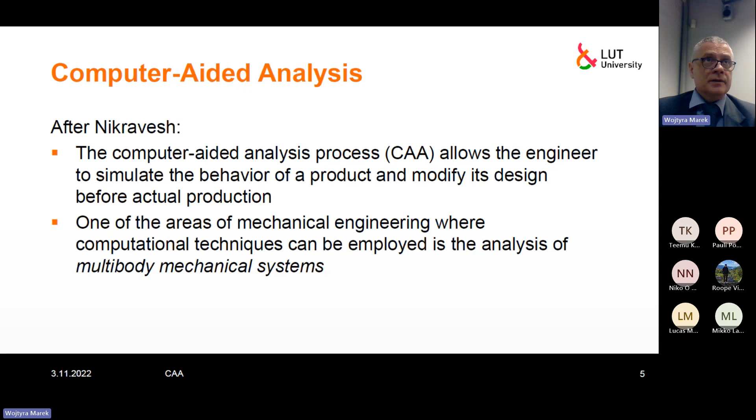So mechanisms are everywhere. Those here are relatively simple, but we have much more complicated mechanisms all around us. A vehicle is a mechanical system, quite complicated. An airplane, everything that moves, an excavator, the lift in this building - so quite a lot of mechanical systems are in our surroundings.

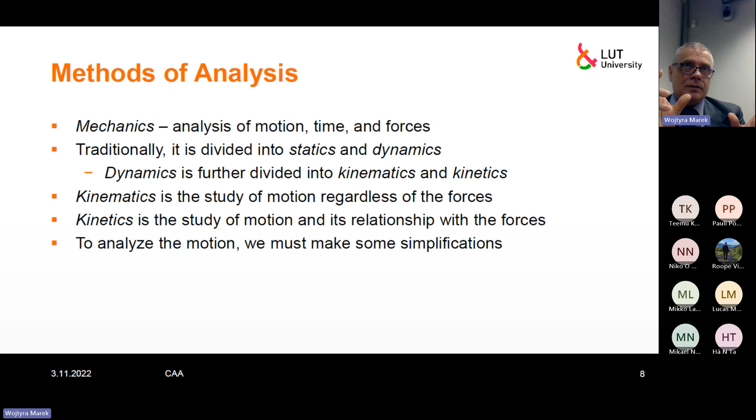It means parts that do not change their shape during motion. They move, they change position, change orientation, but the shape of the rigid body remains unchanged. The other important simplification is that joints are ideal, so we neglect friction. This is important in dynamics—if joints are ideal with no friction, then the calculations are much easier.

It's easier to go forward. Of course, all of those assumptions can be weakened. Taking a next step, we can model multibody systems which are not composed of rigid bodies. We can introduce flexibility and combine flexibility of parts with large rigid body motion of those parts. It's doable—of course it's doable to put some friction model into a joint and to model this. Yes.

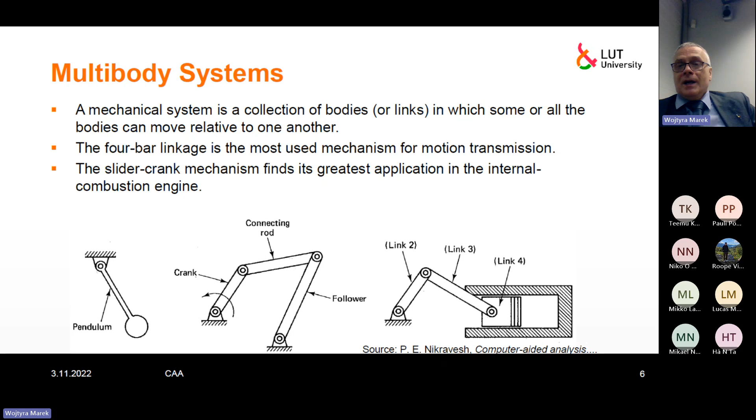We have seen this slide, and this as well. Okay, now some equations, finally.

We quite often need to analyze motion of our system. This is a simple example of a slider crank mechanism, and we are interested in finding the velocity of point B here, having the dimensions of the mechanism. So OA, from here to there, the distance is A. From here to there, the distance is B. And probably phi, this angle here, is given.

In this precise moment, the angle here is 30 degrees. We know the dimensions of this mechanism. We are asking where is point B, and it's probably revealed on the next slide. We know the angular velocity phi dot is known. So we will be asking: what is the instantaneous velocity of point B?

Well, it's a valid question if you want to study thermodynamics of compression gas in the cylinder. You need to know how this mechanism behaves. So this is an example.

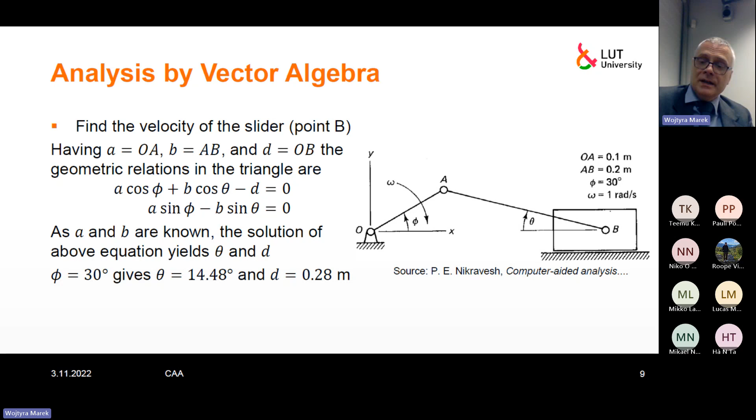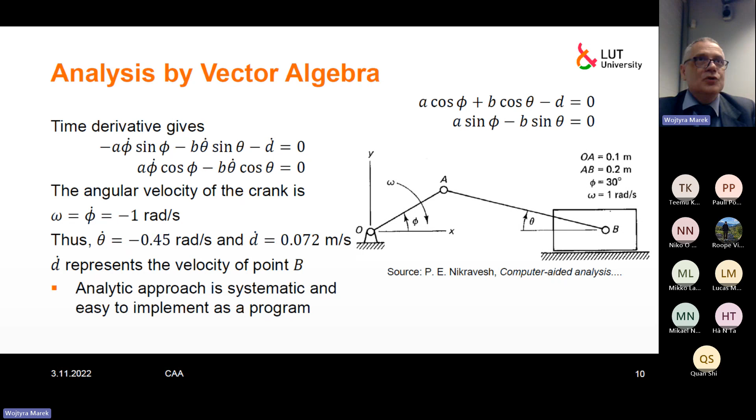So it's good to know, because usually the kinematic part takes a lot of the course, and people don't always know why we deal with those accelerations, because differentiation is quite complicated and tedious. Why do we bother? Well, there is a reason: Newton's law, basically. Okay, let me move on.

In order not to start from scratch for every single mechanism, we can think about computerizing some calculations, and we can do it in two different ways. We can try to create a general multibody code, a program that automatically creates and solves equations and provides us with results, a program that can analyze virtually any mechanism.

The other option is not to use a general purpose program, but a program specially designed for our particular mechanism. In terms of efficiency, if we derive equations for one particular mechanism, we can do it in a much more efficient way, especially the final code would be more effective.

Sometimes we have to do it if we want to analyze a system in real time. For control purposes, we sometimes need to calculate the reality faster than reality occurs. It is very helpful to provide proper control for systems like robots or maneuvering aircraft. So efficiency sometimes is crucial, and we have to analyze mechanisms as efficiently as possible.

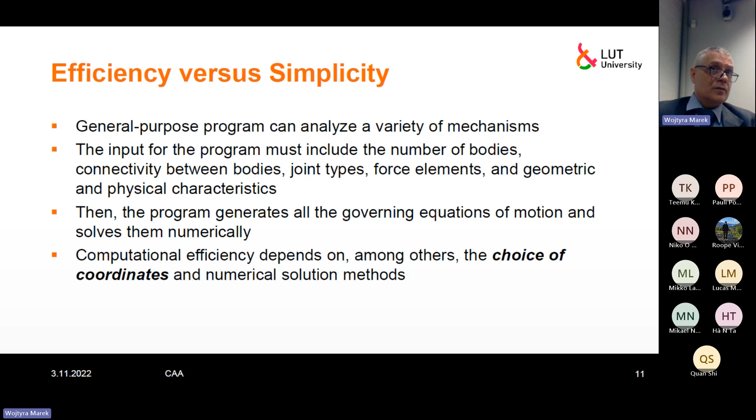Computational efficiency depends on many things, on the skills of the programmers, for example, but also on the choice of coordinates. There are some coordinates that are better for multi-body dynamics than others. The next part of this lecture will be devoted to the choice of coordinates.

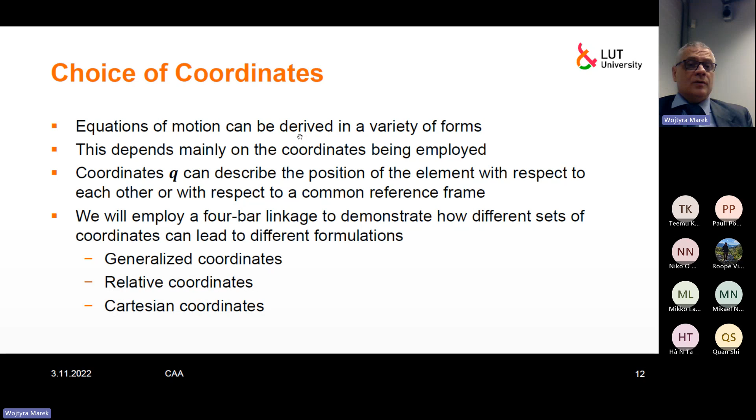So let's go through some examples of choice of coordinates. Let's have a look at the 4-bar mechanism again.

Let's start with generalized coordinates, or minimum coordinates. If we've got a mechanism with 1 degree of freedom, as this has, theoretically we could just use 1 coordinate. Basically, if I know the phi angle here, the set of coordinates is just phi angle. I can tell what's going on with the rest of the mechanism. So the position of the mechanism is fully described by setting the proper value of angle phi, and the other important angles, like angles in all other joints, can be calculated as functions of phi.

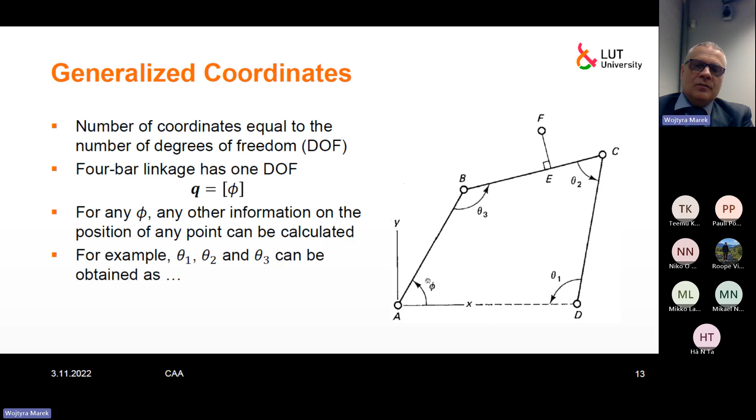Is it easy? Well, it's not rocket science, but the mechanism is not very nice to analyze. If I ask about θ2, it takes some time to say what θ2 is for a given phi. Somebody did it, well, it's like this - probably high school geometry, some theorems, some triangles analyzed, and so on. You can express everything in terms of phi, then calculate auxiliary values like θ1, θ2, and θ3, and solve it. But looking at this example, we can say it's not extremely easy to do so.

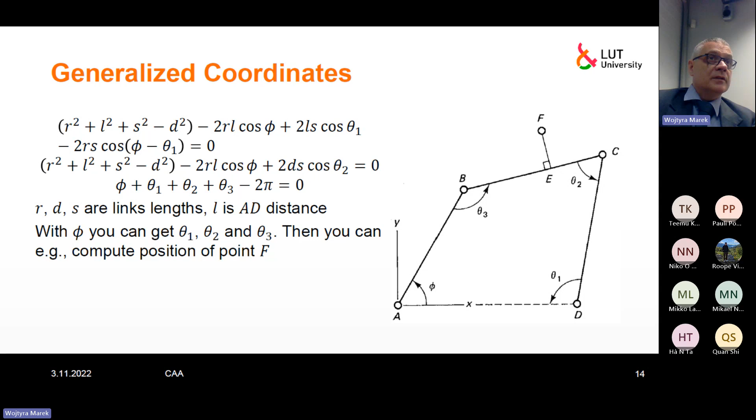Not at all. So this is a very nice simplification, but valid only in planar systems. If you are going to analyze a robot or something which is 3-dimensional, well, that's not the proper way to measure relative coordinates. So this particular picture shows a very special case, very useful, and in planar systems we use it often.

But in general, the idea of relative coordinates is that you measure angle or displacement with respect to the neighboring body. This joint B is created by part 1 and part 2. Coordinate phi2 should measure relative motion of part 2 with respect to part 1, in the canonical approach to relative coordinates. Okay, can we choose those coordinates independently?

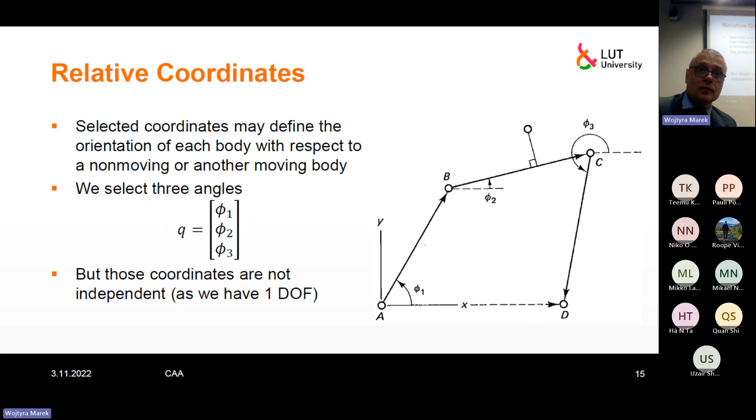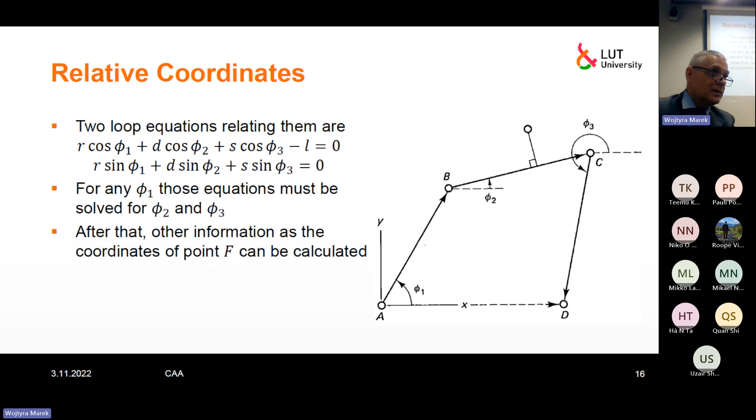If we go back to relative coordinates, you see in constraint equations all coordinates. If there are more bodies, you will see more coordinates in your equations, which means that in the Jacobian matrix you will have a dense matrix. Every single column will be filled with some derivatives of constraints. That's not the case in absolute coordinates, because if you take the derivative of this first equation with respect to coordinates of body 3, there is 0, 0, and 0.

The more bodies you have in your system, the more zeros you have in the Jacobian matrix, because that's a rule. In absolute coordinates, your constraint equations involve just coordinates of part number 1 and part number 2, no more parts. So you have hundreds of parts, and in the Jacobian matrix you will have zeros, zeros, zeros, and just somewhere something non-zero. You can use sparse matrix algebra for computation. So the matrices are huge, but they are not dense, they are very sparse.

Well, have you had a course in finite element methods or structural dynamics? They do have large matrices, like million by million. Of course, they never store it, because they know they are so sparse. Non-zero elements are located at very precisely known places, and sparse matrix algebra helps to solve this huge problem. The same can be done here.

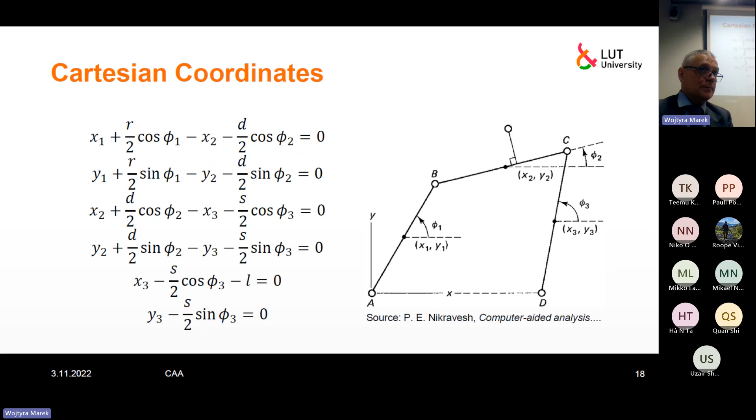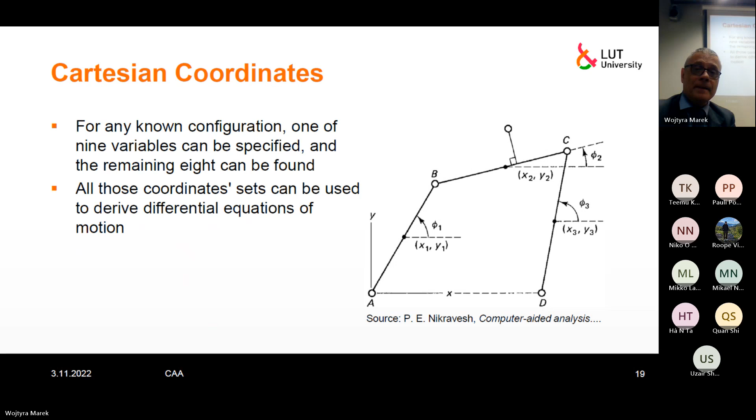So basically, seminal books in multibody dynamics by Nikravesh, by Haug, they all use those absolute Cartesian coordinates because it's a good idea, because they are very nice to do the job required. Okay, so that's the summary of set of coordinate choice.

If we look at minimum coordinates, of course the number of coordinates is minimum, the number of equations is minimum, there are no constraints, but derivation of all equations is very difficult. Development of a program, creating a program, is also very difficult. Relative coordinates are much easier than minimum coordinates, but much more complicated than Cartesian coordinates. As you can see, efficiency-wise, Cartesians are not so efficient, but the difference is not so dramatic.

This part is very important. Cartesian coordinates are easy. We have a uniform approach to everything. Every joint is represented by a separate set of constraints. Every single part has its own set of coordinates. So it is very regular, very easy to automate, and very useful that way.

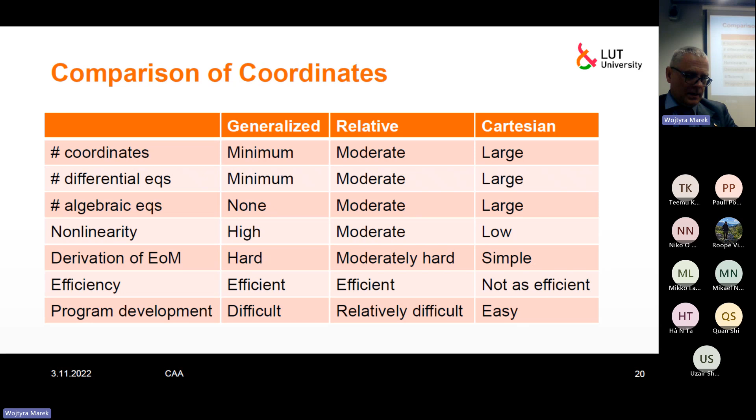To finish this, there are also very nice coordinates called natural coordinates. You may have encountered them somewhere. They were developed in the 80s and 90s in Spain by Garcia de Jalón and Eduardo Bayo. In fact, they are still being used, especially in academic studies, not necessarily in general purpose multi-body codes. With natural coordinates, some crucial points of the mechanism, like points at which link joints are located, are used as coordinates. There are even more natural coordinates than absolute coordinates, but equations are usually much simpler because they are linear or quadratic equations, no sines, no cosines, no angular quantities usually, which is quite a nice feature.

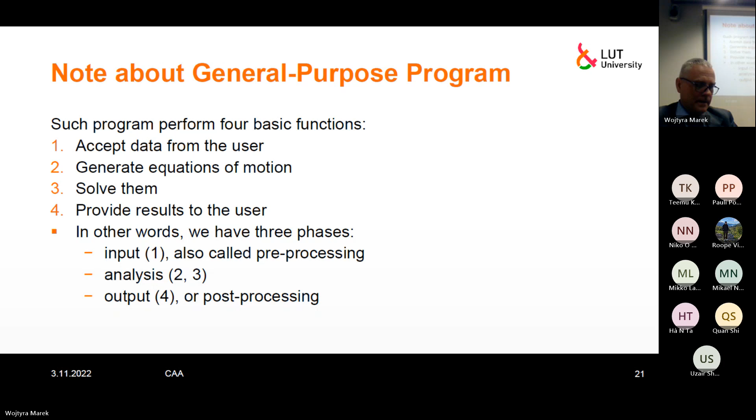Okay, so this is more or less all about this introduction to multibody dynamics, as we decided. As I learned during the break, you are far, far away from this, so more involved courses are done by you. Okay, geometric vector—that's what I see here.

Probably it's again something that you all know: the difference between geometric vectors, basically arrows, and algebraic vectors, columns of numbers. We can use notation like here with an arrow over the letter, which is nice, but for more complicated systems with many degrees of freedom, many bodies, and complicated structure, it's not so easy to use. Especially this pure geometrical notation is difficult to transfer to a computer program. So this algebraic notation, which I'm going to talk about, is much easier to deal with for complicated multi-body systems.

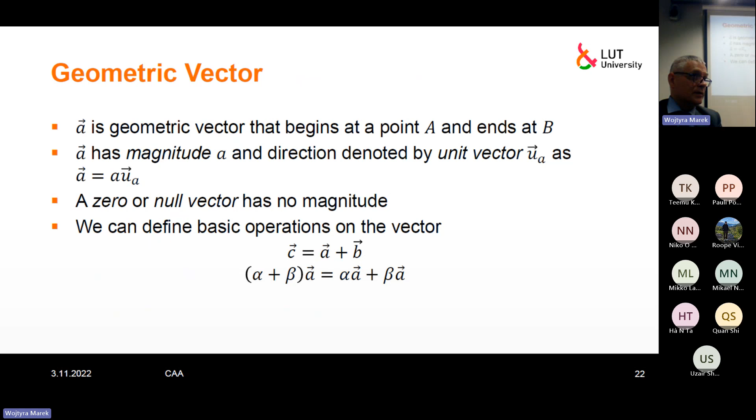So what is a magnitude? What is a unit vector? What is direction? Probably it's already known, so I won't spend much time on this slide. Basic operations like adding, multiplying by a scalar are all known. You of course know there are useful products like the scalar product, the dot product, used to calculate many important physical quantities like work, for example—force multiplied by displacement equals work, and this multiplication is a scalar multiplication: we take two vectors and obtain a number, a scalar.

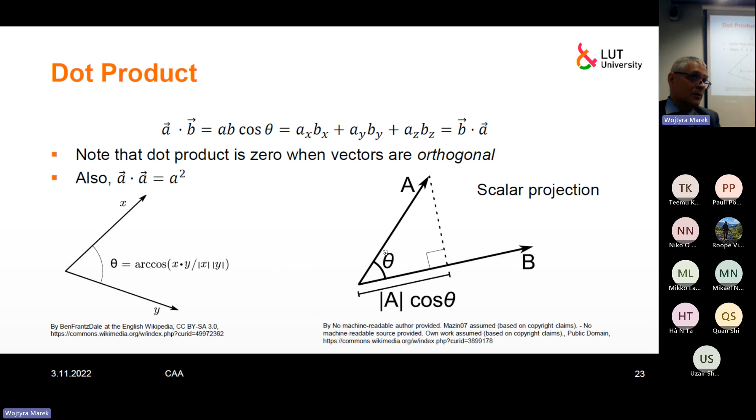Of course, you know that if two vectors are orthogonal, their scalar product is zero. We can calculate this scalar value by taking the length of two vectors, multiplying them with the cosine between them, and that's the scalar product. This cosine decides that if the angle is a right angle, the cosine is zero. So if the vectors are perpendicular, their scalar product is zero. That's more or less what is shown in this slide.

The other important product is the cross product. So we take a vector, we take another vector, and we obtain yet another vector perpendicular to the previous ones. The right-hand rule is accepted. Also, like 100 years ago, some books used left-hand coordinate systems, others right-hand. Now, the right-hand coordinate system is commonly used. So if you take a vector product, cross product of A times B, you rotate A towards B and use the proper direction shown here. No issues, more or less, on how to calculate a cross product.

I think there is no need to spend more time on this. Basically, what we can do with arrows, we can do with our numbers. In our notation, a vector would be a column of, in a planar system 2, in a 3D system 3 numbers: X, Y, and Z components of the vector.

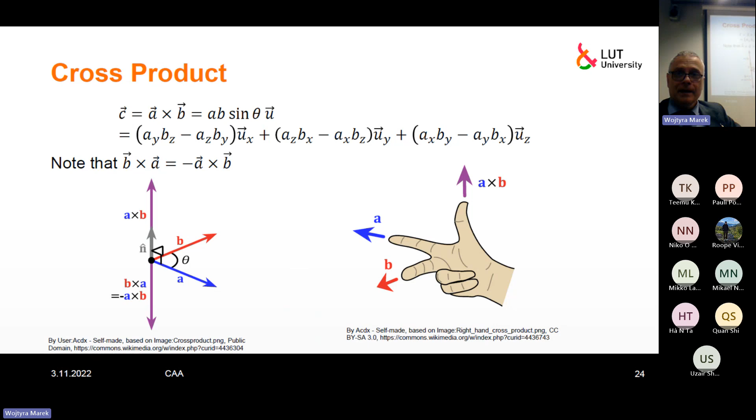I suppose it's taken from some textbooks. So what we usually do when we use computer methods in mechanics, we use this algebraic representation of a vector. A vector is basically a column matrix. Of course, not every quantity that can be put in a column is a vector in this sense, you can add vectors some way. So if you put into those columns displacement along X, Y, and Z, displacement is a proper vector, so if you have a first displacement, another displacement, you can add them in an arbitrary order and so on.

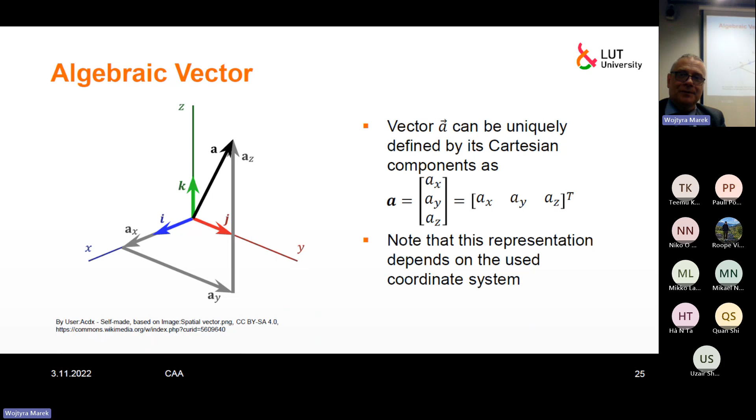Sometimes you can put three numbers that do not form a proper vector, like Euler angles. Are you familiar with this? Euler angles are not along x, y, and z, they are along some skew axis, not the same. You cannot simply take one set of Euler angles and add another set of Euler angles and say okay, my combined rotation is alpha 1 plus alpha 2, beta 1 plus beta 2. No, it does not work this way. So that's it. Not every three numbers taken one under another can be interpreted as the vectors we know from classic mechanics, as those arrows on top. Let's move on with this.

Our important features, like multiplying by scalar or adding, work very well with algebraic vectors, but everything expressed by a scalar product is now expressed as A transposed multiplied by B, the result is what it should be. When we take physics and use this algebraic vector notation, everywhere we meet a dot product, we change it to something like A transpose multiplied by B. Then if we create a skew symmetric matrix like this associated with vector A, we can do this matrix by vector multiplication, which is equivalent to a cross product. So again, whenever we need to calculate a cross product, we want to calculate a moment of force.

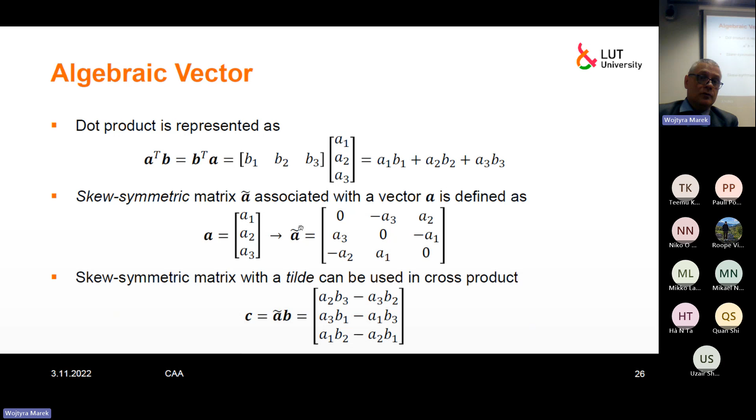We take this and we end up with proper values of the C vector, which is a cross product of A and B. In multi-body textbooks, you will usually see this approach.

So that's all about the vectors.

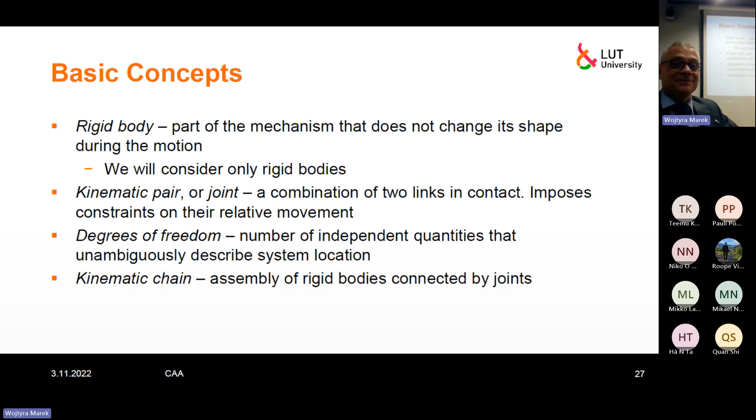Okay, shall we start over? I see all those basic concepts were already used in my talk today, so probably this slide is a bit misplaced - degrees of freedom, kinematic chain, joint, rigid body. Okay, so let's move on.

So that is why, when you are using multibody dynamics software, you create parts, then you create joints. You can't do it the other way, because you need parts to create joints. Okay, so...

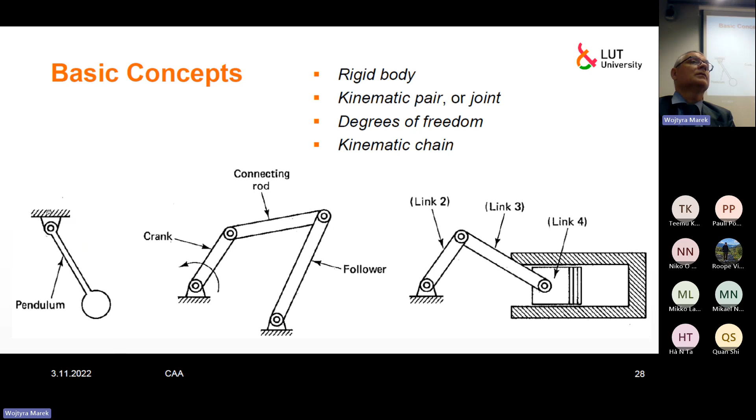What is a kinematic chain? If you take several parts connected by joints, it creates a kinematic chain, which can be open, like a pendulum, double pendulum, triple pendulum, or closed, like a 4-bar mechanism or slider crank mechanism. The point is here is the base, and the base is also here, so this is a closed loop - you can walk around the whole mechanism. In the open loop chain, you will go to the end and have no way to go further.

You will find that. Okay, so Cartesian coordinates, again. So we've got a local frame. I was trying to depict it by words - now we've got a picture.

Yes, there is a body. There is a local frame associated with this body, rigidly connected to the rigid body. A point S is known for the local observer by vector S, with coordinates measured in this x1, y1, z1 frame.

I see that - well, the picture is three-dimensional, the text is two-dimensional. If you think about a planar system, you've got just x and y axis, and the vector pointing from the global reference frame to the local reference frame, which is Ri here, this blue vector, has just two components, x and y, with index i if the body number is i. And similarly, we've got just one angle here, which would be phi with index i.

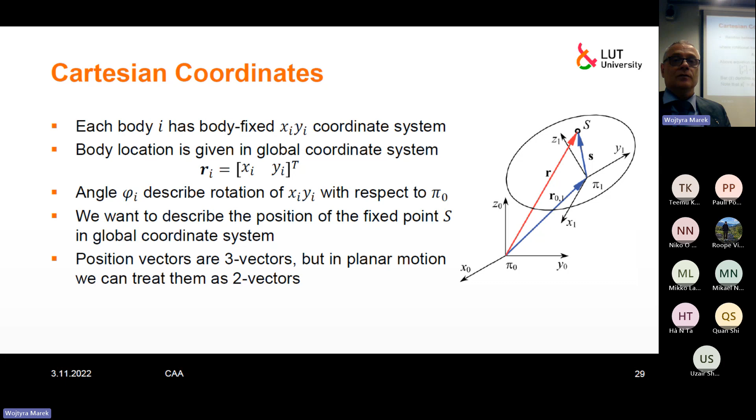Okay, but back to Cartesian coordinates - we have two linear coordinates, one rotational coordinate, altogether three coordinates to describe the position of a system.

Now let's try to do something. This dash over the symbol S means that coordinates of vector S were measured by the observer on the local reference frame. So in the local frame, coordinates are signalized by this dash over S. If I want to calculate the position of point S with respect to the global observer, the global reference frame - this is the red vector R, RS - what should I do? I can go from here to the local reference frame, which is Ri, and then add vector S. The thing is, I need to add this vector S expressed in the same coordinates. Otherwise, it does not make sense - you can't add coordinates expressed in two different reference frames.

So I need a transformation matrix here, which basically says how axes of the local reference frame project onto axes of the global reference frame. This transformation matrix helps to recalculate coordinates of vector S from the local frame to the global frame. Once they are transformed, we can add them because all coordinates are now expressed in the same global frame. That's the point - when you are using Cartesian coordinates, we try to express everything in the same global frame connected to the base of the mechanism, usually an inertial system with respect to which Newton's laws are executed. You have probably seen this transformation matrix before - it's also called the direction cosine matrix.

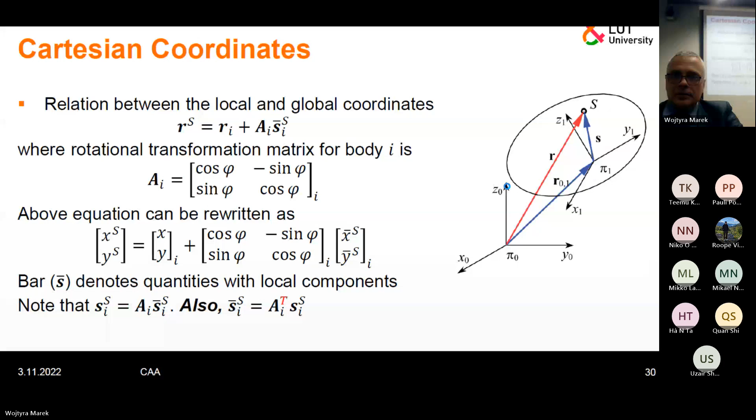Maybe I should make it larger. No, yeah, it's... sorry, slowly responding. No, I was trying to make it larger but I'm not really able to. Okay, sorry. Yeah, now I'm not touching the keyboard - the computer knows better. Ah, that's the reason - my battery just ran off. Okay.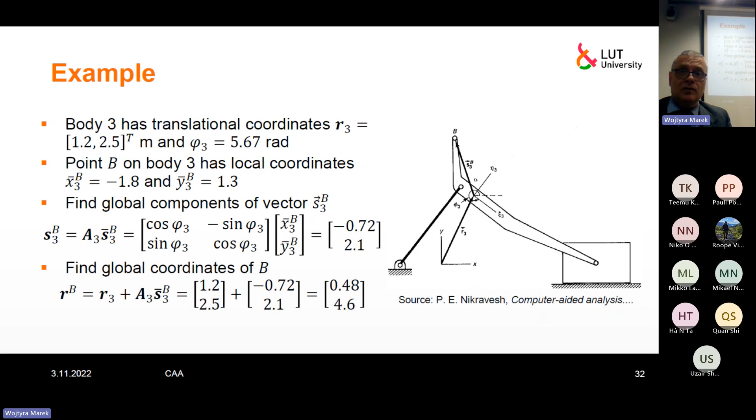Now it's not the case. We have just calculated point B without knowing a thing about the other parts in the system.

Okay, another mechanism. It's so-called quick return mechanism. When this crank rotates with a constant velocity, this slider here goes quite slowly one way and quite quickly backward. For some machines, it's useful when you are

taking out the layers of surface. So you go slowly when cutting the surface, then you go back and you take another cut, and you go back fast and you go back. So this is a fast return mechanism.

It works like it works because the dimensions are properly selected. So this would be if you were to create this mechanism that slowly one way, fast backward, slowly one way, fast backward. You could use the multi-body code just to decide what are the distances, what are the lengths, and so on. So this quick return mechanism, if we look at it, it's a nice planar multi-body system.

It has how many? 5 rigid bodies, it says. 1 here, this crank, 2, this slider here, 3, this rod here, 4, this coupler here, and 5, the slider here.

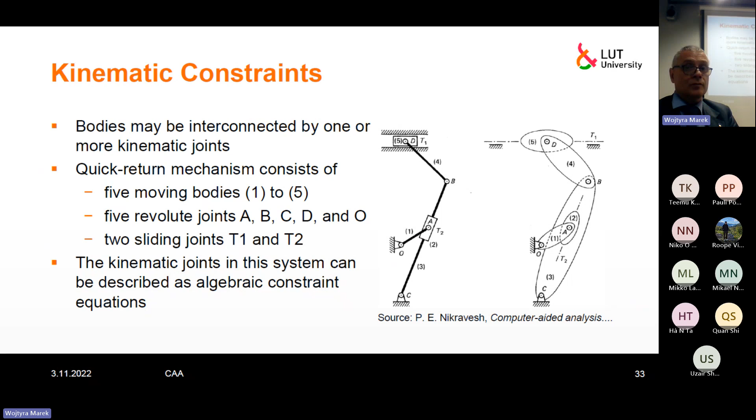Okay, so let's try to create in some organized manner equations that describe joints. We've got revolute joints, we've got translational joints. Let's try to create them.

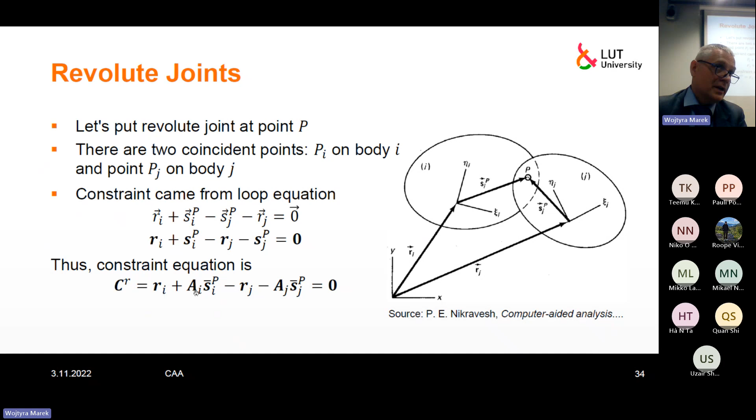After multiplying, after substituting formulas for Ai, we can do it like this, which is not very nice. Often we just stay with this matrix vector notation and let the computer do this, because there is no clear reason for making those calculations. We can stay with the previous form: matrix times vector plus another vector minus matrix times another vector.

So that's it. We clearly see that a revolute joint takes out 2 degrees of freedom, which is true. Generally a planar body has 3 degrees of freedom, but if it is pinned by a revolute joint, it can only rotate, so 2 degrees of freedom are lost, 1 remains. A revolute joint takes out 2 degrees of freedom, which means we need 2 constraint equations. They are right here.

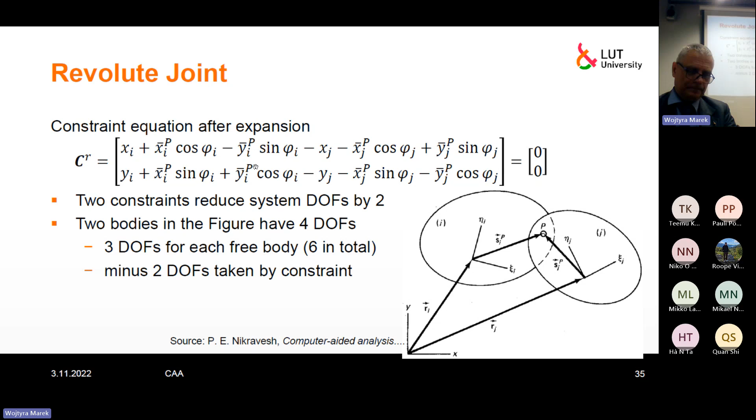How about the translational joint? Well, it's not that easy, but it's still not very complicated. Again, a translational joint should take out 2 degrees of freedom, so we need 2 equations, 2 constraint equations. So let's have a look at

the first equation, which says that 3 points Qi, Pi, and Pj are always in line, which means, let's have a careful look at those indices. This is body I. On this body I've got point Qi and Pi, and those 2 points are specially selected. They are selected to be on the line of translation, okay? And there is one more point Pj, this time associated with part J.

And I say this point with index J should be in line with Q and P with index I. So this particular point, Pj, where is it? It should move along this axis. Again, I need to select it carefully, it cannot be an arbitrary point. It must be a point located on this axis of translation.

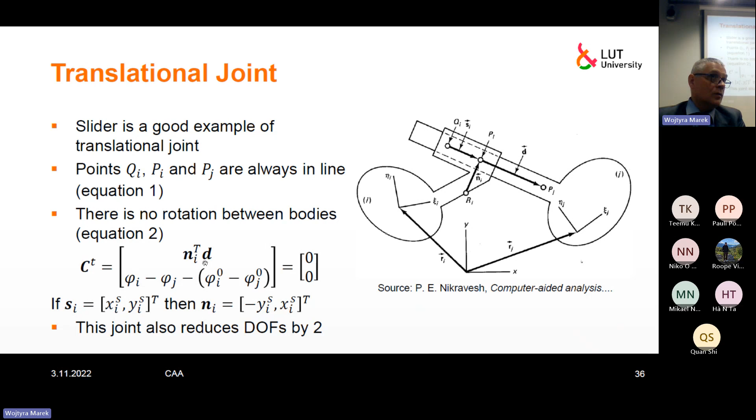That should be enough for this joint. If we know the coordinates of n, then to calculate d, which is from Pi to Pj, we need the local coordinates of Pi and Pj. We'll be able to calculate d. So those geometric quantities should be provided for the program that we are using.

Okay, so now there is a note on simplifying some constraints. It's always doable. If we care, we can simplify our equations by taking into account that, for example—an example is given here—some coordinates never change.

If we look at slider 3 here, and establish a local frame in the middle of this slider, it can go up and down. Of course, by creating the constraint equations for the translational joint here, we would somehow say within those equations that the x component of the local frame does not change, remains zero. Yes, it goes up and down. It means local y3 can change, but x3 cannot change.

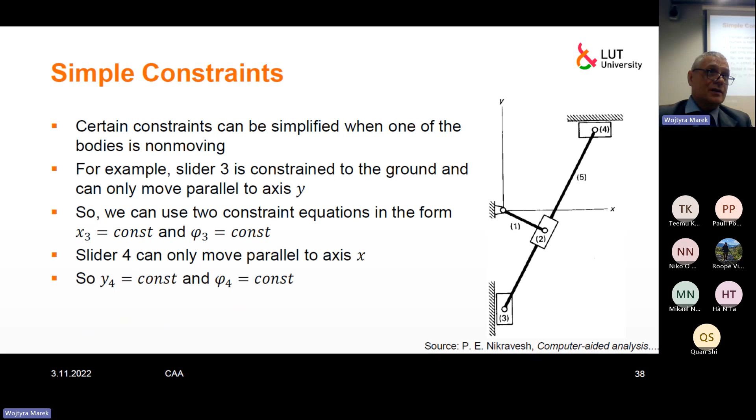In absolute coordinates, we can do this to implement it in a general purpose program. I don't know if the profits are worth introducing such complications to the program to analyze constraints, because you have to detect constraints that say some coordinate remains constant. If you have such a constraint, we can cross out this coordinate. Sometimes you can do this, but it requires extra effort. Without this, your program will still work using a bit more coordinates and constraints, but not losing generality, not requiring taking a magnifying glass and looking for special cases of constant coordinates.

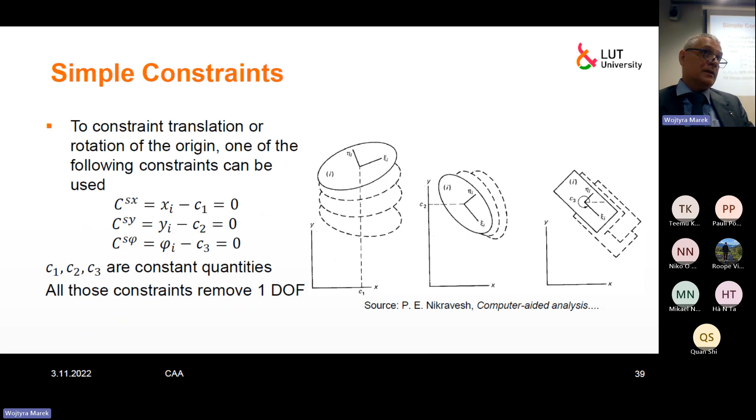This follows, yes, that some constraints can be even simplified. There are some constraints that constrain just 1 degree of freedom. In the three-dimensional case, there are constraints that constrain more than 3.

Okay, another important thing, for the remaining 20 minutes, is driving constraints. Usually, when analyzing motion, driving constraints is a term from kinematics, pure kinematics. If we want to analyze motion without looking at forces and masses, we can do it, but our motion must be somehow defined.

If we just draw a 4-bar mechanism or a standard crank mechanism, it still has 1 degree of freedom. So there is a lot of possibilities for how this mechanism can be located, how its position in time could change. We need to know something about the mechanism. So the pure kinematic analysis requires creating so-called driving constraints.

Usually we simply know that something is moving somehow. In this quick return mechanism, we know that the motor is making the crank rotate with a constant angular velocity. What we may ask is, due to this input motion, how does the output motion look? That's the idea behind the driving constraints.

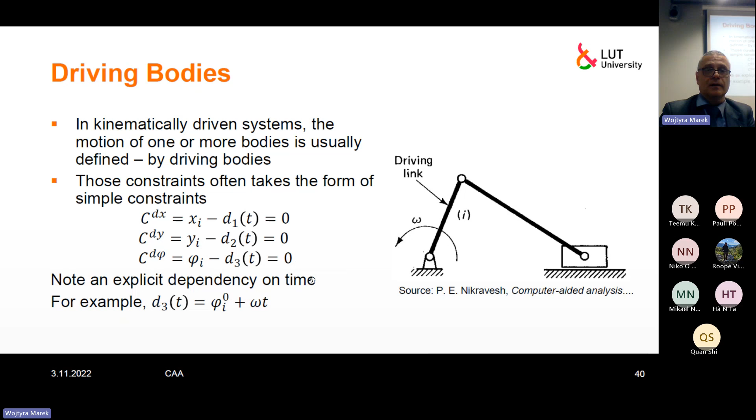In those driving constraints, there's usually an explicit function of time, like here: the angle phi equals phi 0 plus omega multiplied by time t, which means constant rotation with velocity omega. And then, having our constraints describing the kinematic structure...

So far we were talking about, for example, a 4-bar mechanism. Our 8 equations, the constraint equations, just describe the kinematic structure, allowing for motion, but the motion was unknown. If we add information required about motion, we add one more equation. For a 4-bar mechanism, we've got 9 coordinates, 8 constraints describing the kinematic structure, the constraints representing kinematic joints, and one more.

Because we've got just 1 degree of freedom, we need one more piece of information in the form of a driving constraint, usually an explicit function of time. If we add this 9th equation, that's interesting: we've got 9 equations with 9 coordinates, which means as many equations as unknowns. The kinematic problem is then fully formulated.

What about time? Is time an unknown here? What is time? It's just a parameter. We know the time. For time 0, the crank is in this position, okay? Calculate the rest. And for time 0, velocity is given, so calculate all velocities of interest. For time equals 0, the crank is in this position, velocity is known, acceleration is known, calculate all accelerations of interest.

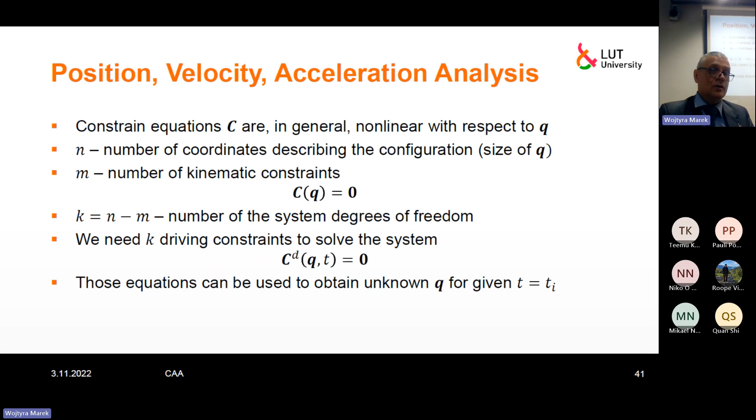We must know position. Velocities must be known here to calculate, to solve this set of equations. So it's always this order: positions, velocities, accelerations, and the problem is solved. Having q dot, q double dot, where q is the absolute coordinate, Cartesian coordinates vector, we can calculate position, velocities, whatever we want in the mechanism.

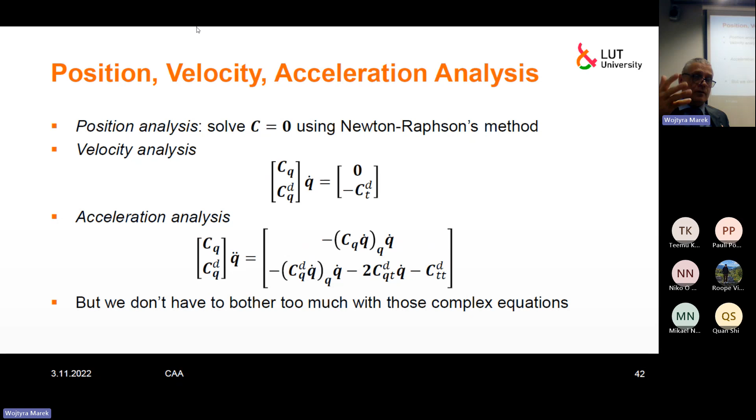Okay, and that's for the very end of this lecture. There are some additional equations. Imagine that we managed to solve for a given time the position, velocity, acceleration problem. So we do have absolute coordinates for a given time.